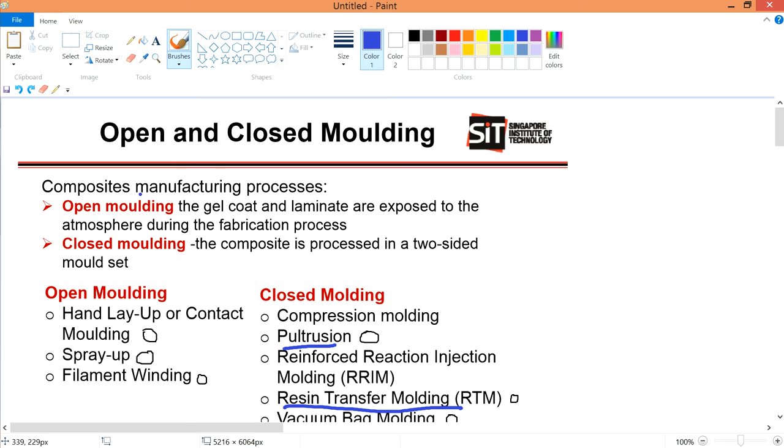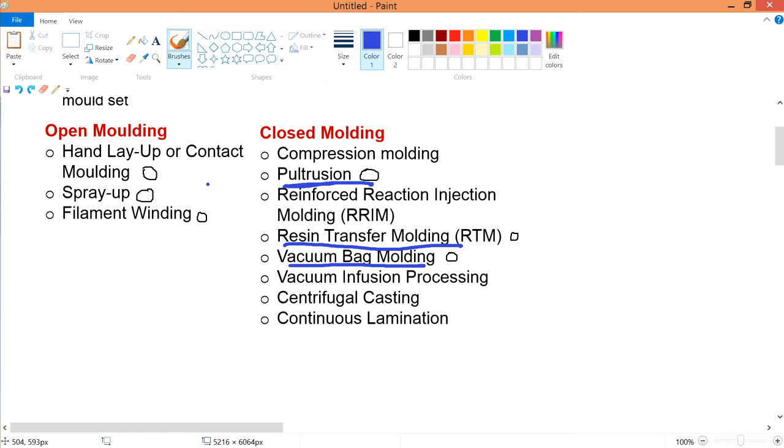Previously we talked about the open molding process, now we talk about the closed molding process. All the while we are talking about manufacturing process, where you're talking about manufacturing the composites. So for closed molding in these slides, only 3 things are being discussed, while the rest are not discussed. In this video I hope to address 3 of these things. In the next video I'll briefly touch on the things not touched in the slides. Let's start off with pultrusion, which is the first one, and see how it goes.

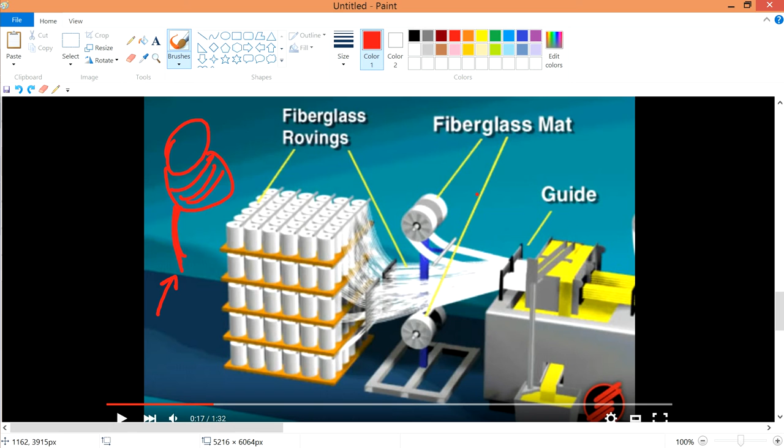The first step is that there will be fiberglass rovings. Fiberglass rovings are like this, where they feed only a strand of the fiberglass, while the fiberglass mat is feeding in terms of a toilet paper, fixed in a piece like this. For a roving, remember it's feeding a strand of fiber, whereas over here it's feeding a piece of the fiber. If I zoom in, this is feeding in terms of a paper, and this is feeding in terms of a strand, as you can see.

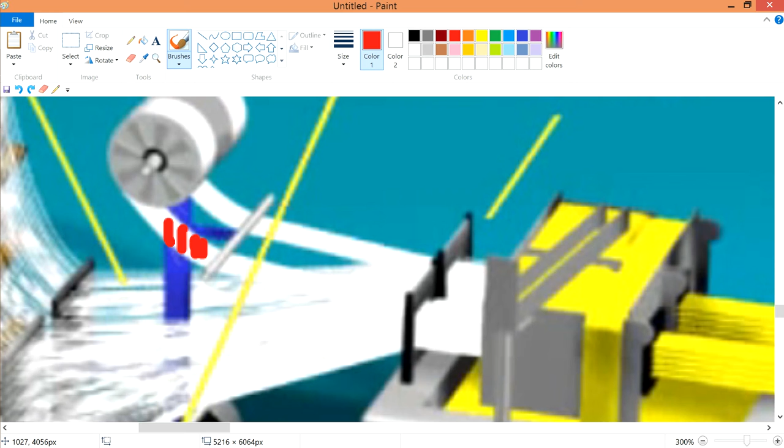Over here, your resins will be impregnated, or in other words, your fibers will be coated with a certain resin, and it's being coated in this part. Then there will be a certain surfacing material, which I believe is to protect the resin and the fibers, and this is the part where they feed in the surfacing material.

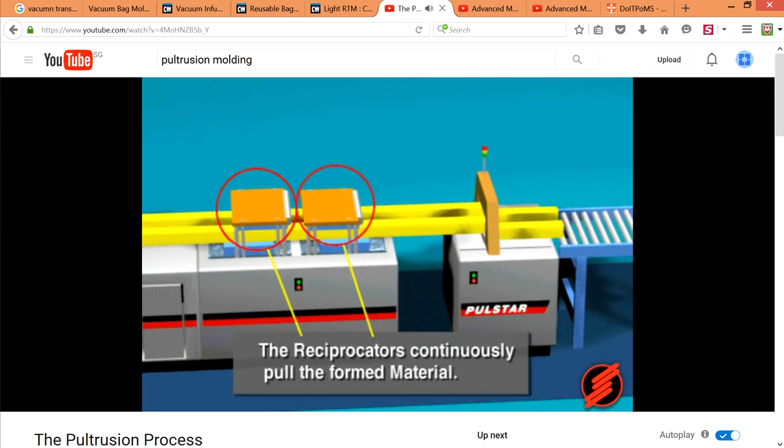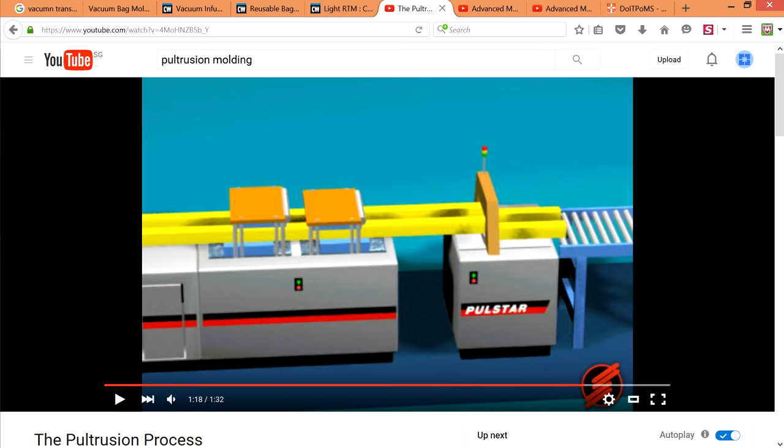So roughly you would understand where it comes from. This part over here will try to pull all this material towards the side. Once you pull it over at this side, there will be a cutter over here to cut it, so you have this material. This material will go into this roller and roll to somewhere else for packaging. This is somewhat the pultrusion manufacturing method.

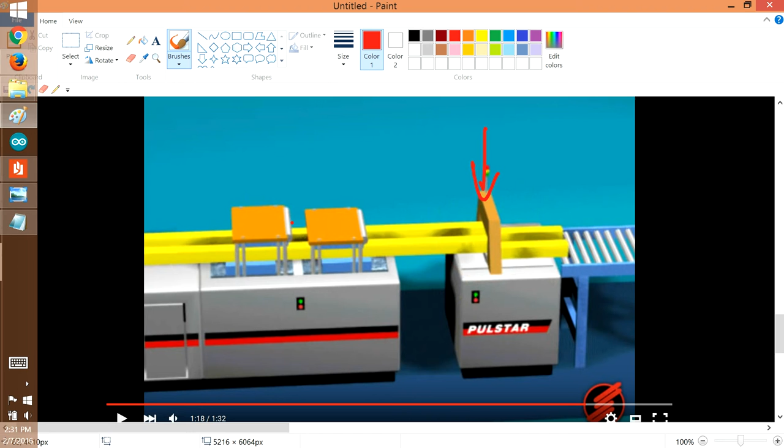To better help this sink in, in terms of a real life manufacturing process, you can just watch here.

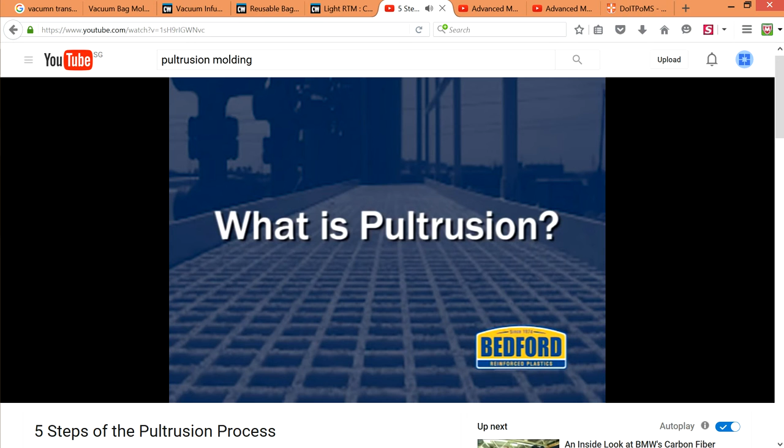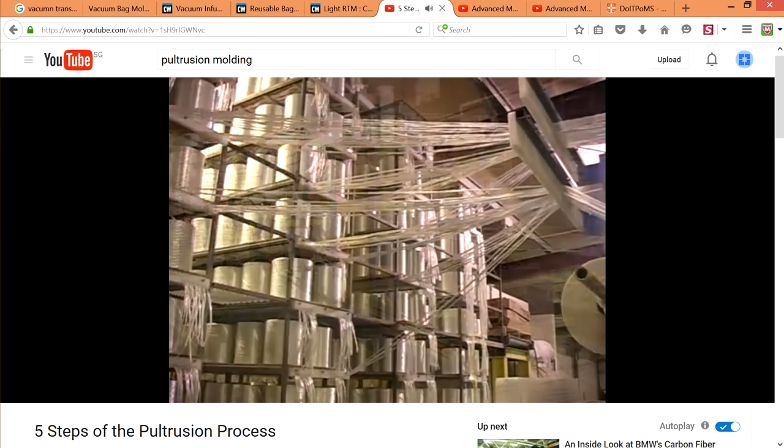What is pultrusion? Pultrusion is a manufacturing process for producing continuous lengths of fiberglass reinforced plastic shapes with a constant cross-section. While pultrusion machines vary in design, the process is basically the same. Let's first start with the fiberglass reinforcement. Creels of unidirectional roving provide longitudinal tensile strength, or strength along the length of the profile. Rolls of continuous filament mat, woven roving, or stitch fabric provide the profile with its transverse properties, or strength across the width of the profile.

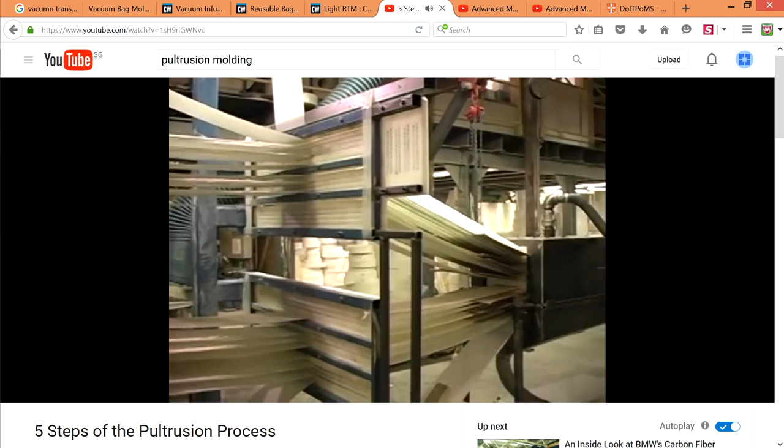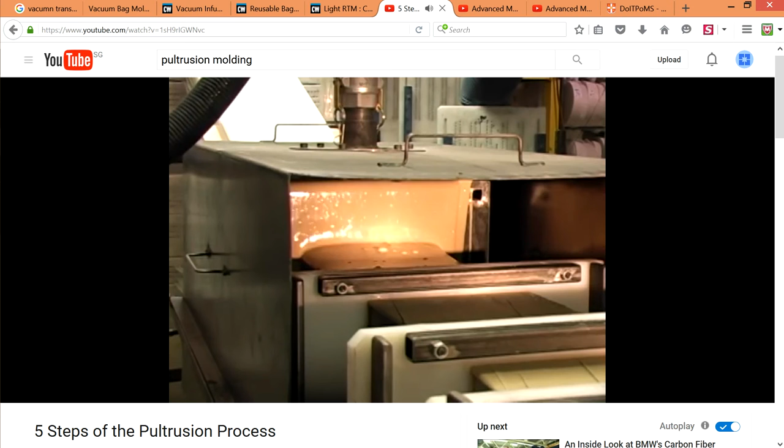All reinforcements are first fed through preforming dies that begin to shape the raw glass fibers into the finished profile. The glass is then pulled into a resin bath that saturates or wets out the reinforcements. The resin bath contains a mixture of resin, most commonly polyester or vinyl ester, pigment to add color, filler to enhance properties, and a catalyst to aid in curing or to turn it from a liquid to a solid. Surfacing veil is added to give the profile a resin-rich surface and enhance the appearance of the final product.

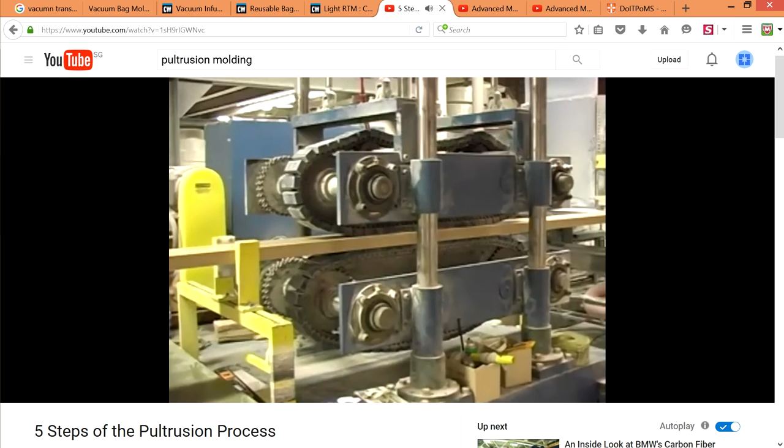The wet-out reinforcements now enter the heated pultrusion die. The heat begins the thermosetting reaction process that cures the finished profile. The cured profile is now advanced by a caterpillar-style puller to the cutoff saw, where it will be cut to its final length. The finished product is now put into inventory at one of our warehouses, sent to our state-of-the-art fabrication center for secondary processing, or crated for shipment to the customer.

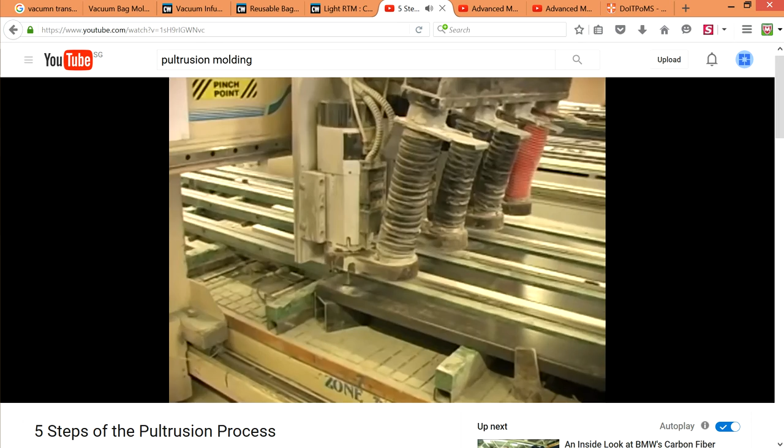Slides didn't explain much about pultrusion, so it's being referred to the reading materials. Pause the video, read, and highlight the things you need.

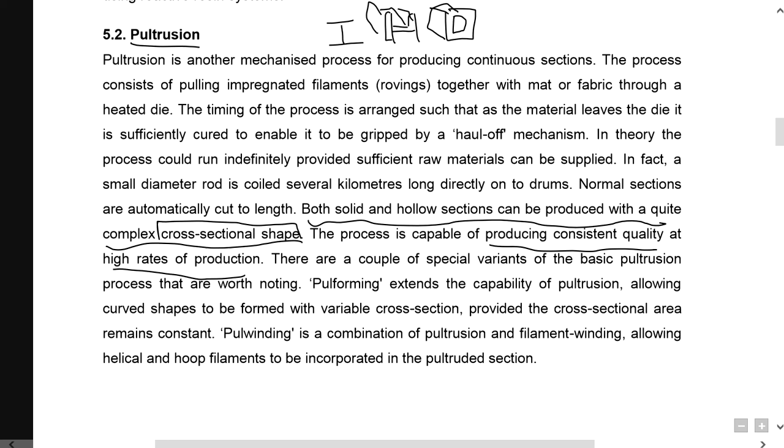Solid and hollow sections can be produced with quite complex cross-sectional shapes. With pultrusion, you're talking about certain cross-sectional systems, like an I-beam, H-beam, or a simple hollow beam, if you go into 3D. So when manufacturing these, you're actually manufacturing a beam. The process gives consistent quality and high rates of production, and requires lesser labor compared to other manufacturing methods like hand layout. So in terms of labor cost, pultrusion is relatively cheaper and more of a machine-based system.

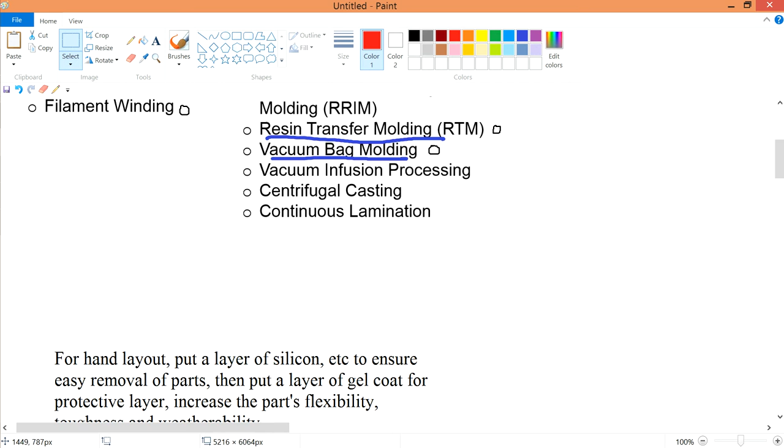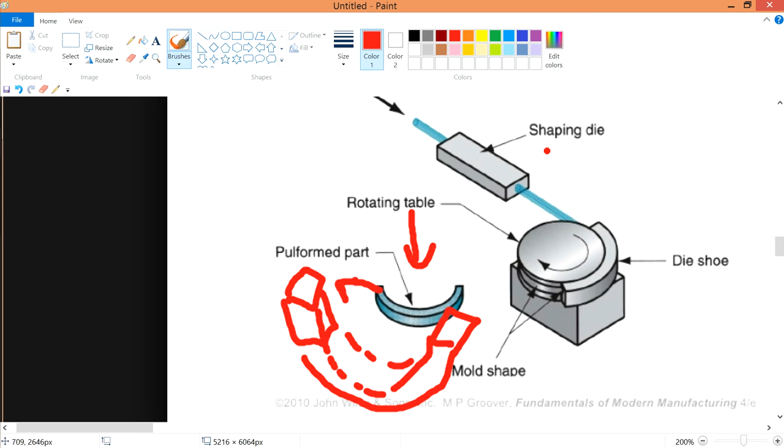Here you have a shaping die, which shapes a constant cross section. There's a rotating mechanism that creates a certain shape. Once this shape is created, if you look at this point, it's another cross section, different from the first one. If you go all the way along this bent shape, looking in this direction, that's also a cross section. So here you create a curved cross section while the shaping die maintains a constant cross section. That's how pulforming works.

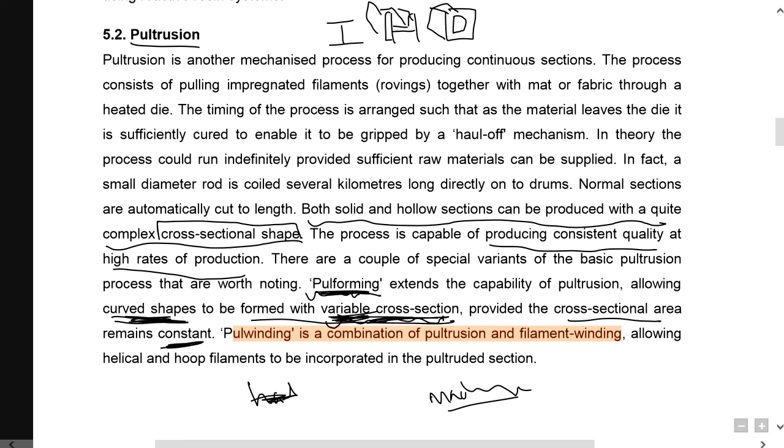Pulwinding is a combination of pultrusion and filament winding, which we've covered before, so I won't go into details, but at least you know a bit about it.

I suggest you understand and memorize the pultrusion advantages, especially low cost, low labor, and high production. This applies to pultrusion, though I think pulforming also shares these advantages—actually, all of them, pulforming, pultrusion, and pulwinding, share these benefits.

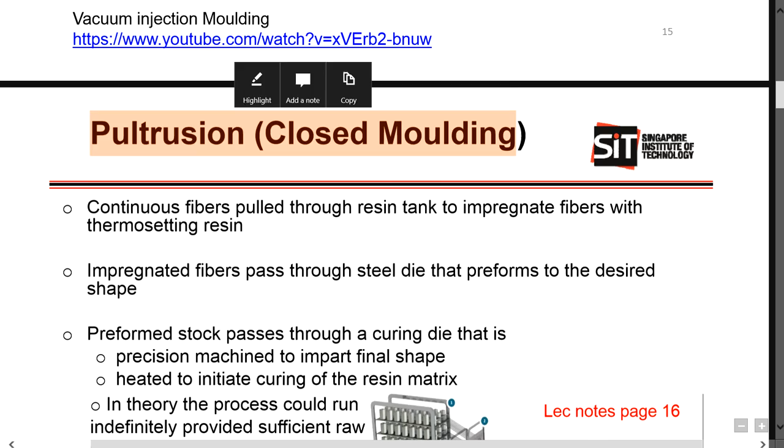I'll stop here since this is a heavy section. We've covered pultrusion, so we'll talk about resin and vacuum bag in the next video. See you there.